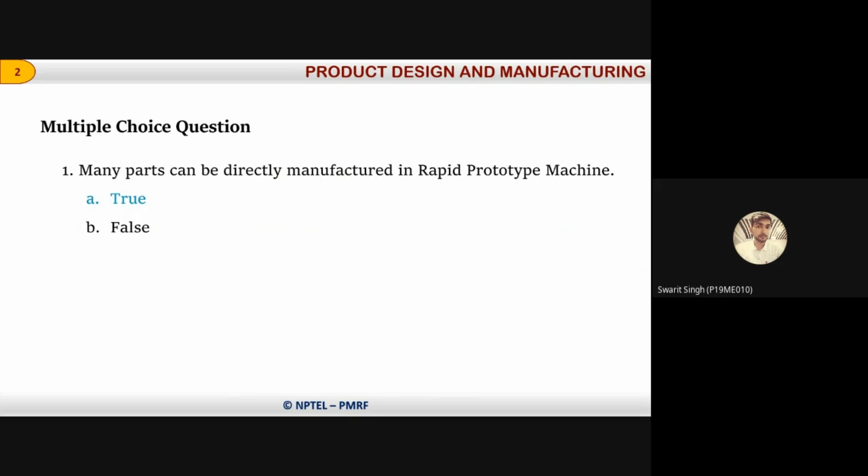First question is on your screen: many parts can be directly manufactured in a rapid prototype machine - true or false? A very simple question. Answers please - yes, true. Yes, it is a true statement only, no need for further discussion.

Question number two is on your screen now: how many cameras are used in photo sculpture while shooting a product? 24, okay.

In the course content, we have two types of things: one is topography and another is photo sculpture. In topography, we arrange the components or items in an area - suppose you want to build some buildings, some construction work. The model we make for showcasing the upcoming project comes under topography.

Next is photo sculpturing. Here, with the help of cameras, we create the structure of that particular component or object. We use a certain number of cameras - the answer is C, 24. We use 24 cameras to capture the image of a single component from all 360-degree sides at the same time.

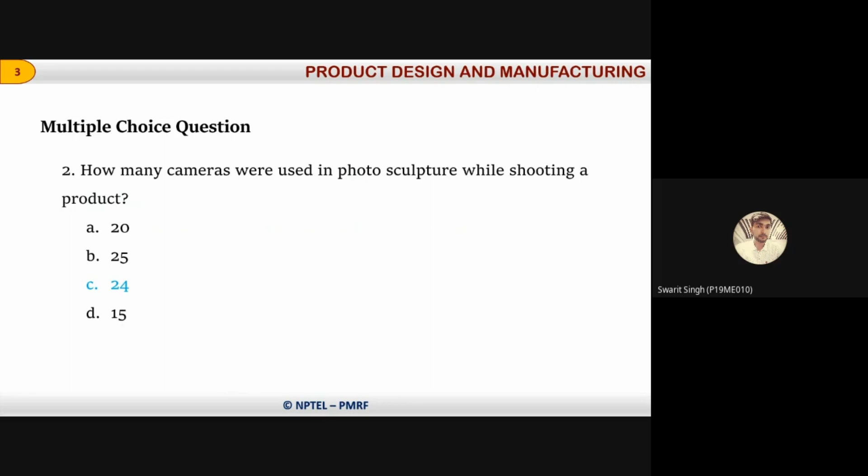Next question, question number three is on your screen: which of the following are displaying systems accessible to make 3D outlines? The options are wireframe, surface modeling, solid modeling, all of these.

Okay, so yes, all of these is the correct answer. So to make the 3D outlines, what is wireframe?

What I was talking about, that we did in our childhood, wireframe structure. With the help of matchsticks and all, we used to make some frames. For our projects also, we used to create certain frames with the help of some wood, and then we used to paste paper around it, so that a 3D object or 3D box should be created. So this kind of work we did, that is wireframe model.

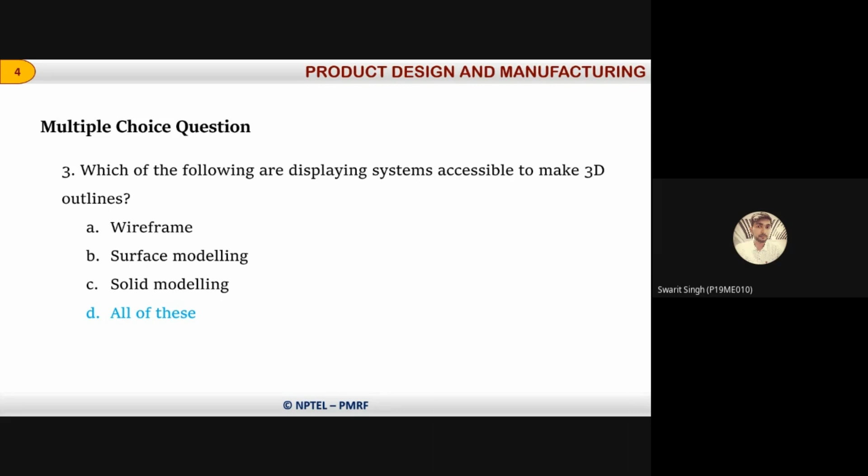Question number 4 is on the screen. It says wireframe models don't contain surface and volume information. Is it true or false? Based on the discussion what we did, what do you think? Do the wireframe models contain surface and volume information?

Yeah, Shiva says A. Do wireframe models contain surface and volume information? Because in wireframe, what we are doing is just taking lines and vertices to represent the model, right? So it is a kind of net structure. And if there is a net kind of structure, surface is not existing, right? And volume, definitely it is not there.

So this is a true statement. Sorry, Siva is right, because it is a negative statement - it says 'don't contain', like.

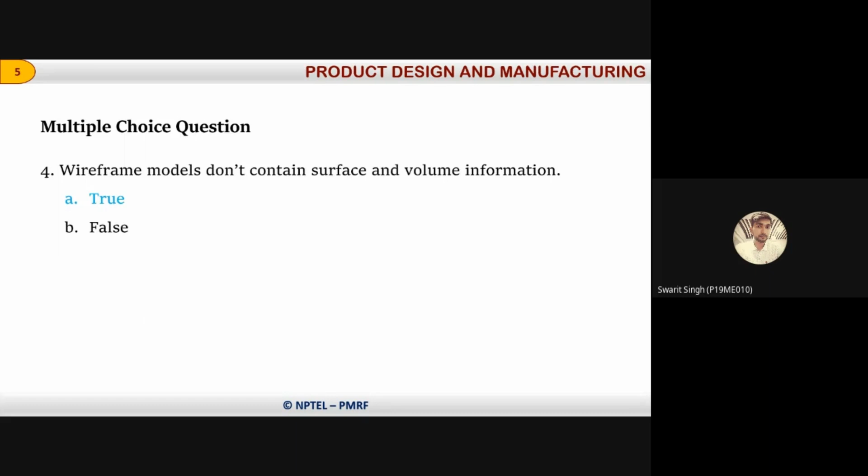So moving to the next question. Which of the following processes don't belong to rapid prototyping process? Options are exporting, data validation and repair, file manipulation, none of these. Again, there's a negative line here - 'don't'. So all of these belong to rapid prototyping.

In rapid prototyping, first of all we create the model. Then after creating the model, we convert that model into a relevant file format, .STL is the most commonly used one. From there, we export the data to the rapid prototyping software, which does some calculations and validation before starting the manufacturing process. If there is some error in the earlier conversion, it repairs it, and then certain file manipulation is also done at a later stage before starting the actual printing operation. So the answer is none of these.

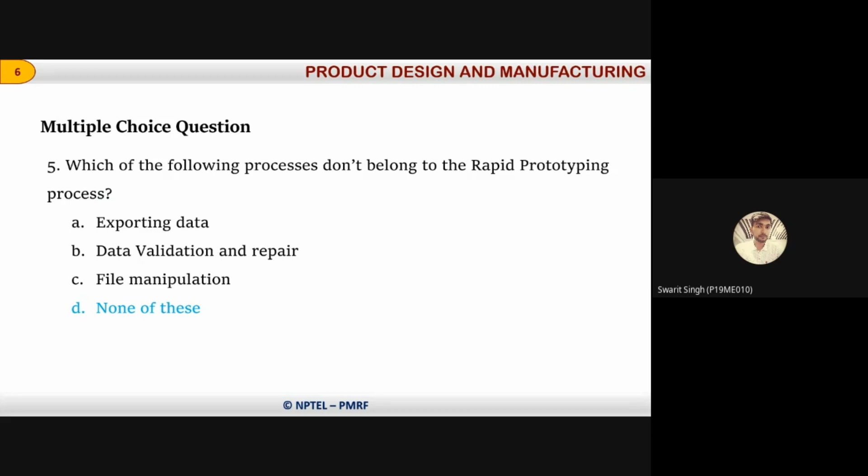Next question, question number 6 on the screen. Which of the following processes uses laser to make voxels and solidify thermosetting material? So in which process are lasers used? Options: stereolithography, liquid thermal polymerization, beam interference solidification, none of these.

Beam interference solidification - what happens here is there are two beams at a right angle, or maybe a certain angle. They strike inside the medium, and then they solidify that particular medium. At the interference, a certain intensity is created so that it can solidify the component, solidify the particular medium into a component. That's beam interference solidification.

The answer for this question was liquid thermal polymerization, where we are using a thermosetting material as mentioned in the question. So in that, this liquid thermal polymerization process uses laser to create the required object.

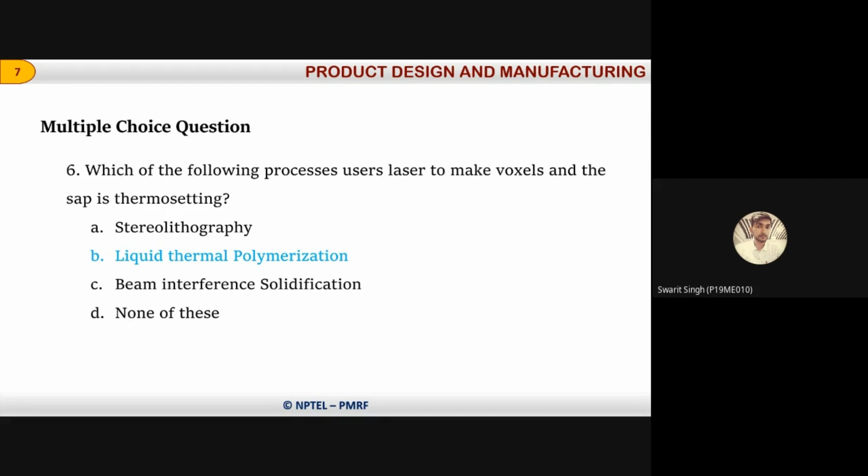Next question, question number 7 is on the screen. It says beam interference solidification utilizes two laser shafts mounted at right angles to each other, which emanate light at various frequency to polymerize gum in a straightforward vat.

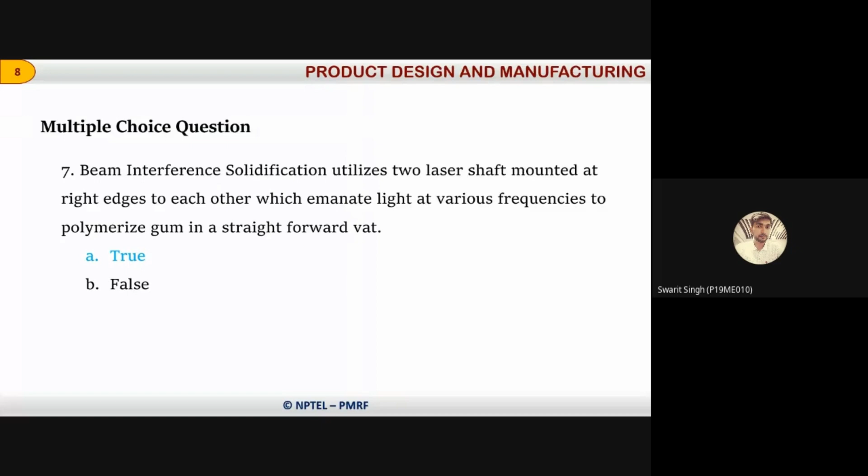Yes, we just discussed it. It is a true statement only. At right angles, when the two lights strike and interfere, a certain intensity is generated which can solidify the medium.

Question number 8 on the screen. It says, in fused deposition modeling, the assembled material is warmed to blank its melting point. Options given are: 0.5 degrees Celsius under its melting point, 0.5 degrees Celsius over its melting point, 0.5 degrees Celsius times its melting point, or none of these.

Answer for this question. Question number 8 is on the screen. B, 0.5 degrees Celsius over.

So FDM is the most commonly used additive manufacturing process, and FDM printers are most frequently in demand. If someone knows about additive manufacturing, they have certainly used fused deposition modeling based printers. I was sharing a video showing that FDM process, where material is fused in a liquid or semi-liquid or paste form, and then deposited in a particular pattern to create the required component or object.

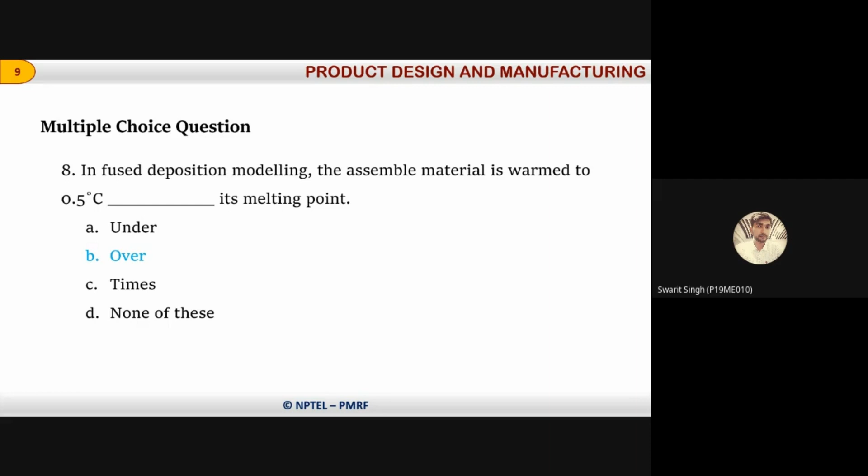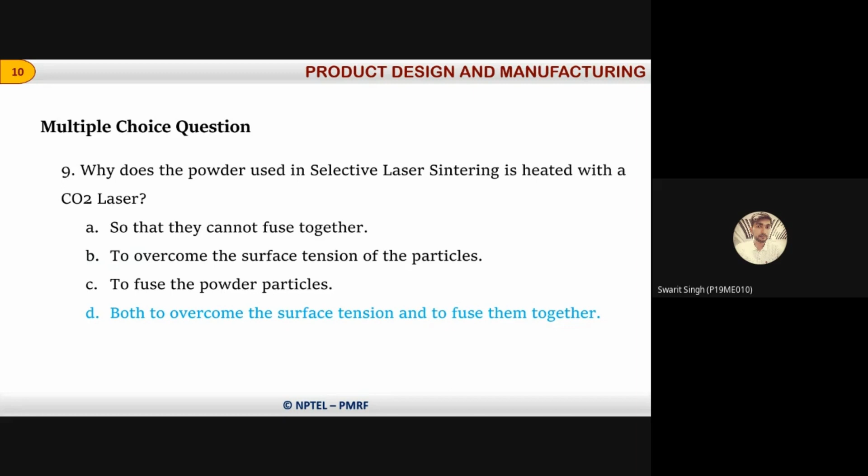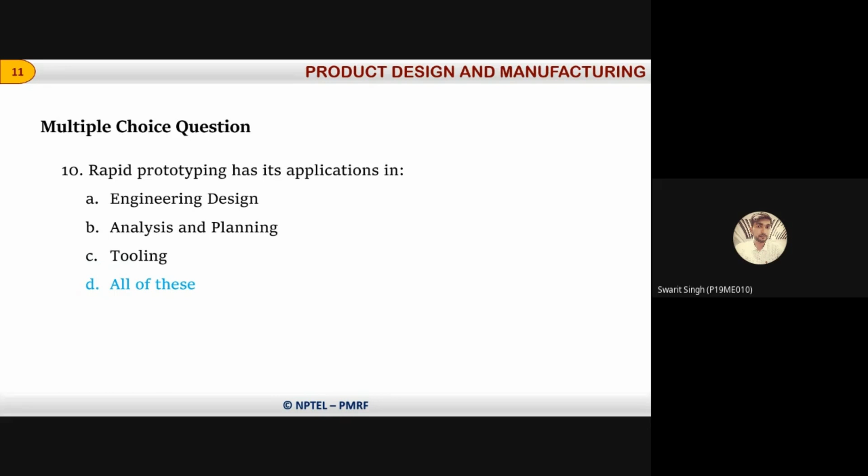Last question for this session: rapid prototyping has its application in which field? Engineering design, analysis and planning, tooling, or all of these? C, tooling. Shiva says all, yes. So the application of rapid prototyping is in all of the mentioned applications - engineering design, analysis and planning, and tooling. Rapid prototyping is involved at every and each stage.

So again, this week there was no question. Uh, oh, sorry, I just-